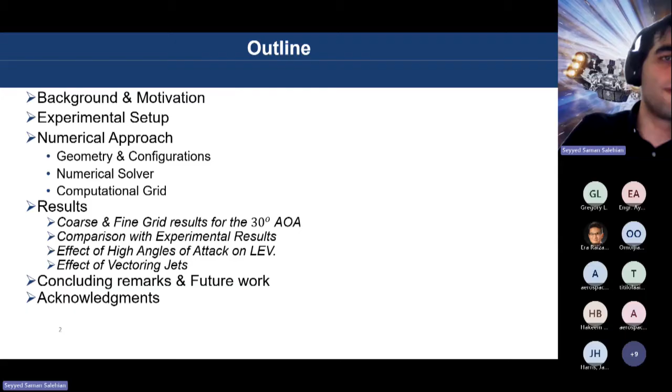My name is Saman Salehian. I'm an aerospace engineering major myself, and I'm an assistant professor at Tuskegee University at the Aerospace Engineering Department. I graduated from Embry-Riddle Aeronautical University in 2020 and joined Tuskegee University in 2021. My work today is going to be about vortex dominated flows over delta wings and how we use numerical simulations and experimental measurements to deal with this phenomenon using thrust vectoring. Today I'll talk about the background and motivation, the experimental setup, the numerical approach, some results, concluding remarks and future work.

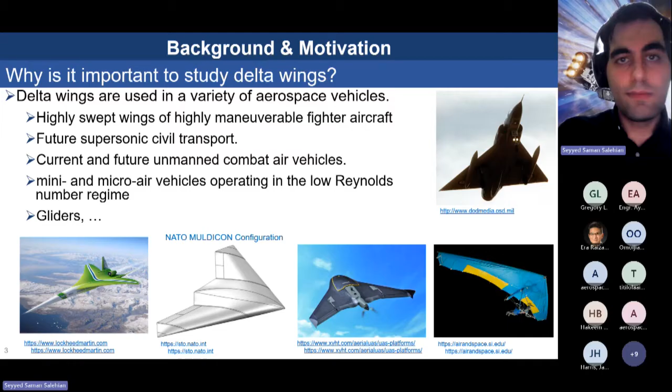So why is it even important to study delta wings? Delta wings are used in a variety of aerospace vehicles. The most famous one is the highly swept wings of highly maneuverable fighter aircraft. But also future supersonic civil transport aircraft, current and future unmanned combat air vehicles, mini and micro MAVs, which more or less have a delta wing planform, as well as gliders. In a lot of these cases, we care about safety; we want them to have a safe flight without disruptions. So it is important for us to understand the aerodynamics of delta wings.

Many investigations have been carried out over the years, and we typically look at slender and non-slender delta wings. To summarize, there are what we call leading edge vortices. These are roll-ups of air trying to escape the high pressure under the wing to the top of the wing. This creates these counter-rotating vortices, which are the reason delta wings are preferable at high angles of attack, because they produce a lot of lift.

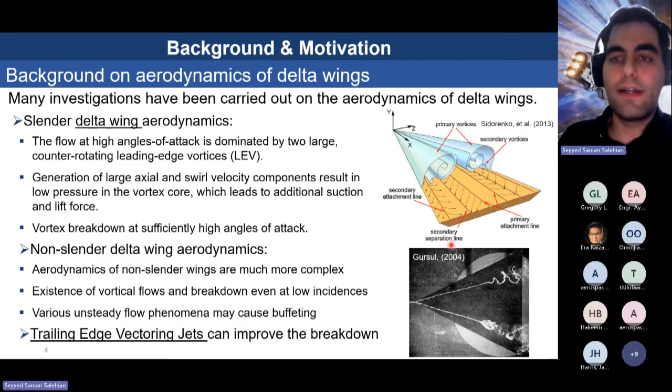But there is a phenomenon called vortex breakdown, especially at high angles of attack. This causes vibrations, flow unsteadiness, loss of lift, and loss of flight control, something we do not want in our aerospace vehicles. We'll also talk about trailing edge vectoring jets; many fighter aircraft have already implemented that technology with jets vectored at an angle, which causes performance improvements.

For the experimental setup, we have a water tunnel at the Aerospace Engineering Department at Tuskegee University. Right here is the CAD model of our water tunnel. And here's the actual picture of a delta wing with attached pumps that will provide the thrust vectoring.

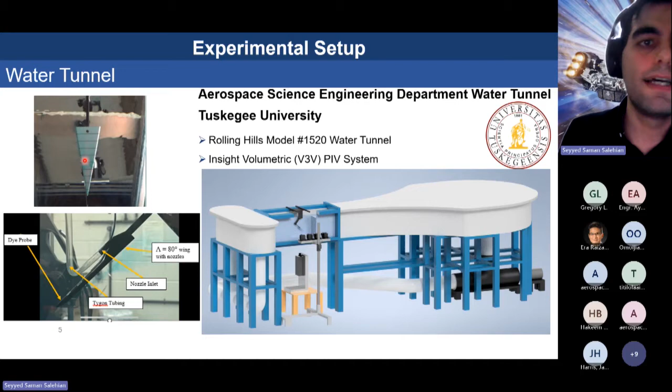Then you can see we have our delta wings in a simplified aerodynamic shape, because we are interested in the fundamentals of this. Now, we don't model the full aircraft with all the details. We're just isolating the aerodynamics of the delta wing itself and the jets.

So the way that we use experimental setups, we have a test model in here, and we have the water tunnel running, and we have very high resolution 3D PIVs, particle image velocimetry, that collect data on every point of the grid that we provide here.

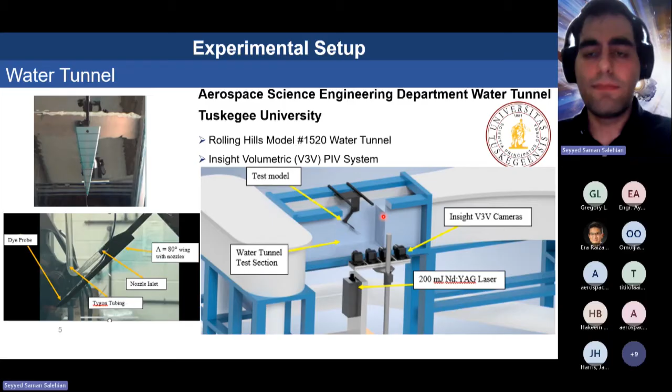Also, we use a numerical approach where we look at the delta wing, the shape of the delta wing, which has a certain chord. Here we are looking at the 80-degree sweep angle. We use a flat plate. Basically, we consider, as I mentioned, the fundamental aerodynamic shape, and we look into 20-degree vectored jets that provide 5

times the jet ratio. And we got that through a literature review to look into what is the jet velocity of typical fighter aircraft that perform high angle of attack maneuvers and have jet angles. And these are basically the numbers that we compiled together.

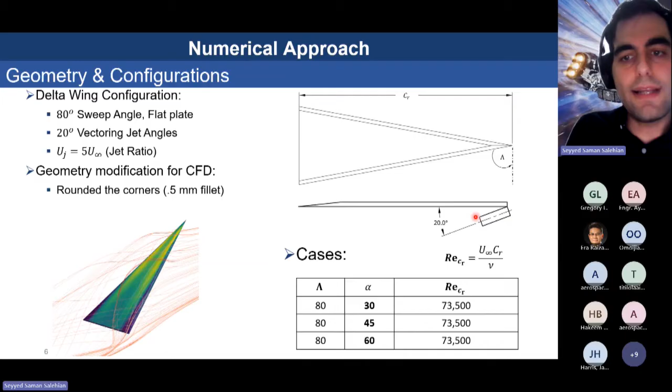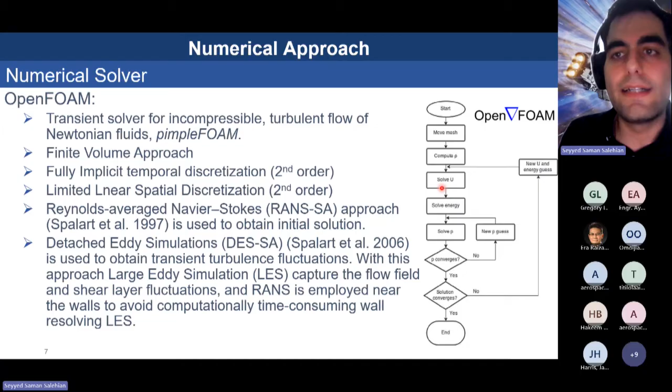So the first setup I'm going to look at is the numerical approach. The numerical approach that we use is a transient incompressible turbulent flow solver in OpenFOAM, which is a finite volume approach. And we use second order temporal and spatial discretization. The method that we use to capture turbulence is called detached eddy simulation, which is a hybrid LES and RANS. And if need be, I'll talk about the details of this in the Q&A.

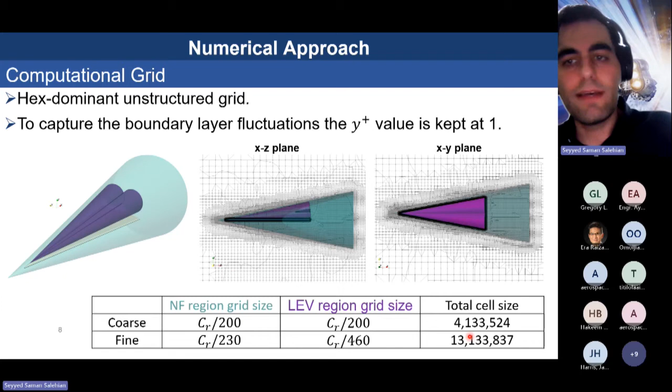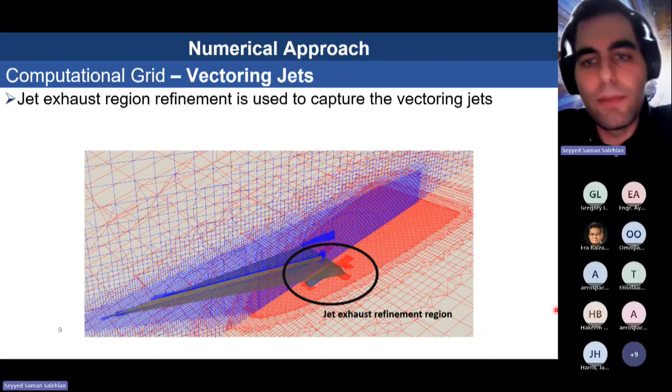The computational grid is a high fidelity hex-dominant unstructured grid. To capture the boundary layer, we use very low grid spacing near the flat plate. And here I have certain figures of merit to show the scale of the fine solution: a grid of 13 million cells. And we use some refinements near the jet to capture the velocity and turbulence of those vectored jets.

So here we can see that we definitely need high resolution to capture all this turbulence and all this unsteadiness that happens over the wing. We're looking at the baseline case, no jets, and we're looking at the variable called Q criterion. Q criterion is basically a variable that is derived from vorticity, and if need be, I can talk about the details of the calculation, but basically we're looking at the rotation of air particles, a property called vorticity, and we are looking at the non-dimensionalized one.

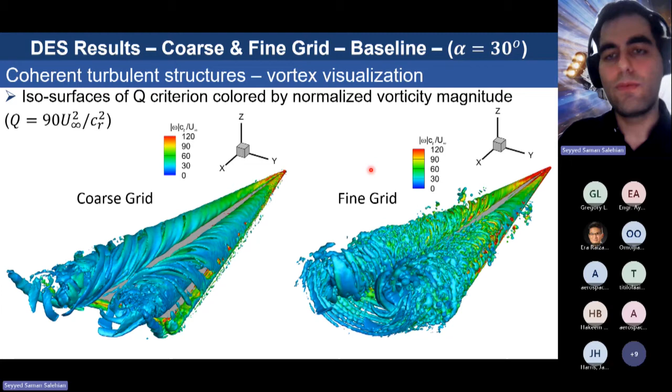So if we use a coarse grid, which is the low resolution, we don't capture those fine fluctuations or fine unsteadiness, but we still get that main vortex and counter-rotating vortices. So to be able to capture these, we compare our coarse grid with fine grid cross sections at different cross sections of the wing. We're looking at 25%, 50%, and 75%.

If I use the fine grid, not only can I get the extent of these compared to my PIV, but also get very good resolution inside the vortex core. And to get a better comparison, we look at these cross sections at 50% and 75% of the chord, and look at the center line of those two rings. If I cut a cross plane through those counter-rotating vortices, I will see these two circles, and here we're looking at the line that goes through the center line of that.

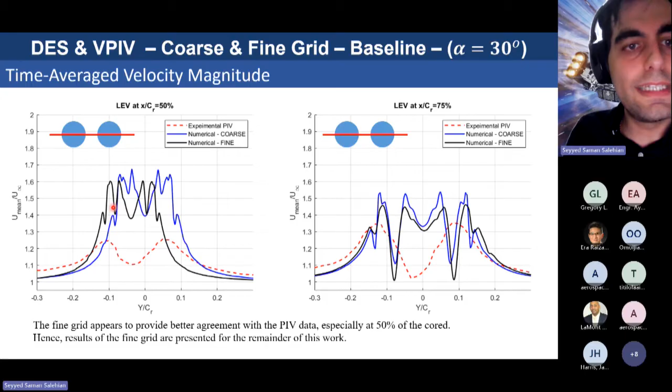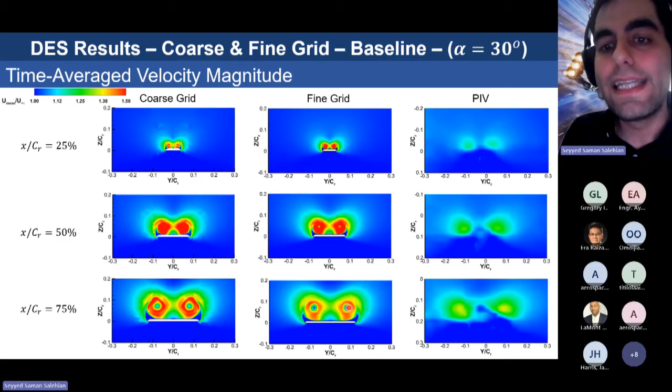So if I look at the PIV, you can see that our numerical results actually predict the location, the peaks, as well as, mostly near the trailing edge, the extent of it. We have some discrepancy here, and this discrepancy is mostly because our PIV grid is coarser, not as refined as our numerical simulation. So we use PIV mostly to get the general characteristics, but we use CFD where we can look into more details, finer structures inside those vortex cores.

So then we started looking at what happens at high angles of attack. First, before going into higher angles of attack, we looked at an aircraft that flies at 30 degrees angle of attack, which compared to typical aerospace vehicles is still high. We don't see any vortex breakdown. It only happens when you look into 45 degrees angle of attack, where the vortex breakdown happens.

And if you go even higher, that becomes severe, and you can see the fluctuations increase, and then you lose the lift generating mechanisms on the surface of your aircraft, and basically you lose aircraft control, eventually aircraft lift, with increased unsteadiness and increased fluctuations, and this is what we don't want when we put things into perspective in terms of air safety.

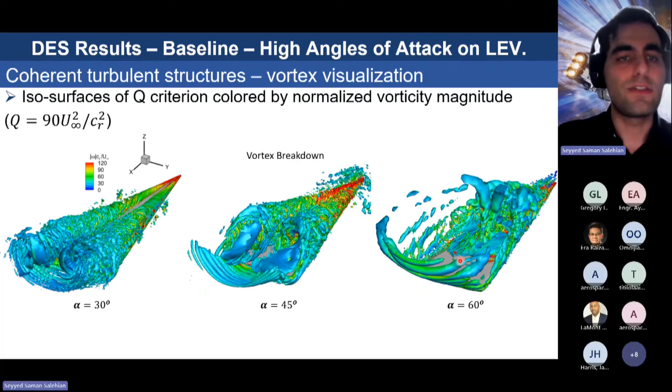Then we started looking into these, comparing at high angles of attack. As you can see, right around 50%, and even at 75%, for the 30-degree angle the vortex remains attached. You have those vortex cores, but right here you don't see any cores. Those are gone. It's all dominated by the wake of the flow, and that's even worse for the 60 degrees, which happens even near the leading edge.

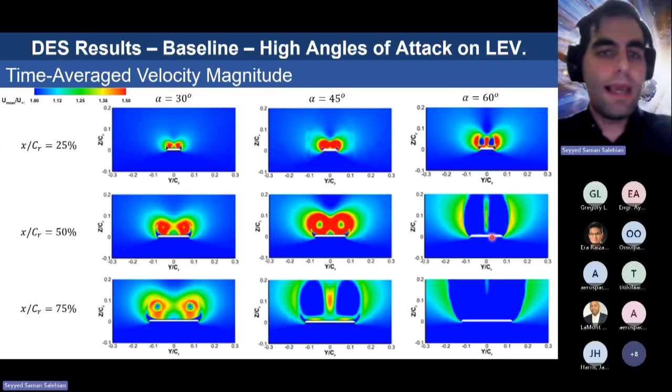But if you go to 45 degrees, this is where the vortex breakdown happens, and we are estimating that to start somewhere around here, mid-chord. And at a very high angle of attack, 60, the vortex is already broken down here, very close to the leading edge.

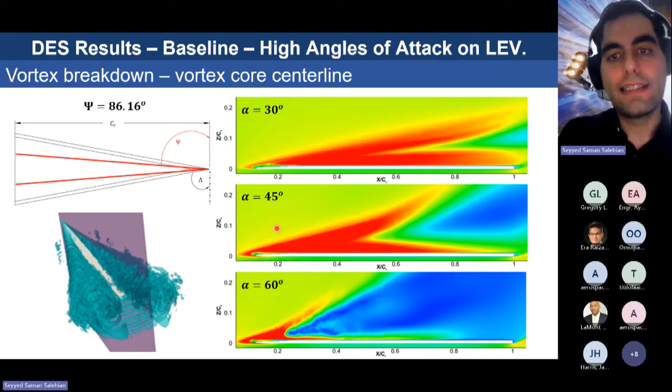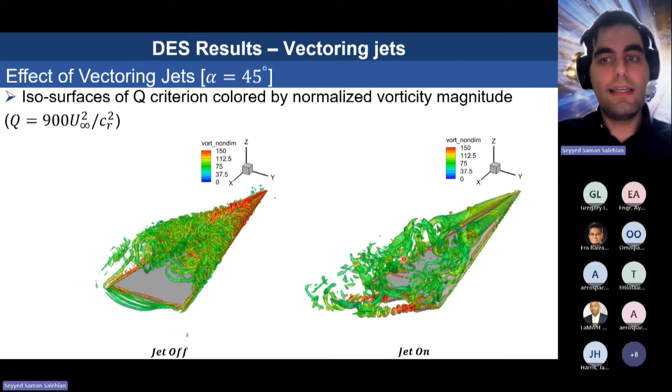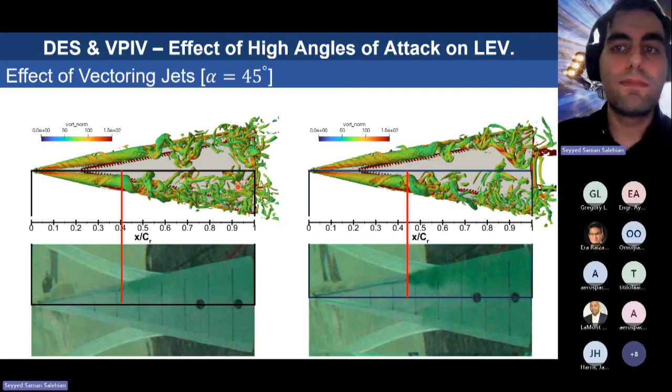But for us, at least at this part of the research, it was important to see if these jets, injected with the right velocity, minimum enough to change this, are effective. We saw it is effective.

So just some concluding remarks, because I was running late, I'm trying to go over these faster to leave some room for Q&A. Numerical results show that the detached eddy simulation we adopted can predict the location and development of leading edge vortices. We also conducted a grid sensitivity study to see how accurately our numerical models can be compared with our experimental PIV. And we looked at some of the higher angles of attack; 45 degrees for the 80-20, 80-degree sweep angle, 20-degree jet, is of specific interest for us. So we isolated that and started looking at the vectoring jets.

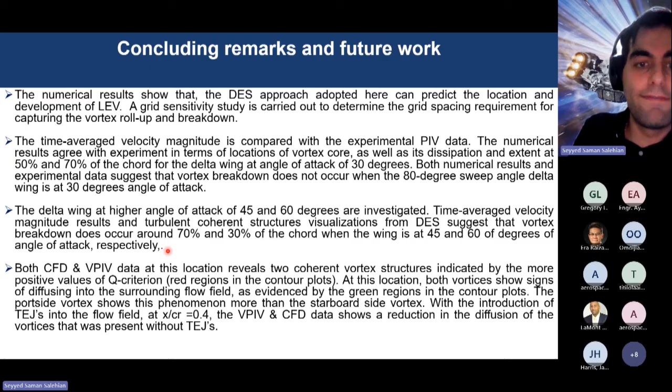And basically we saw that those vortex structures indicated a positive Q criterion, and their location was pushed backwards, near the trailing edge, which is a positive sign and shows the effectiveness of the trailing edge jets.